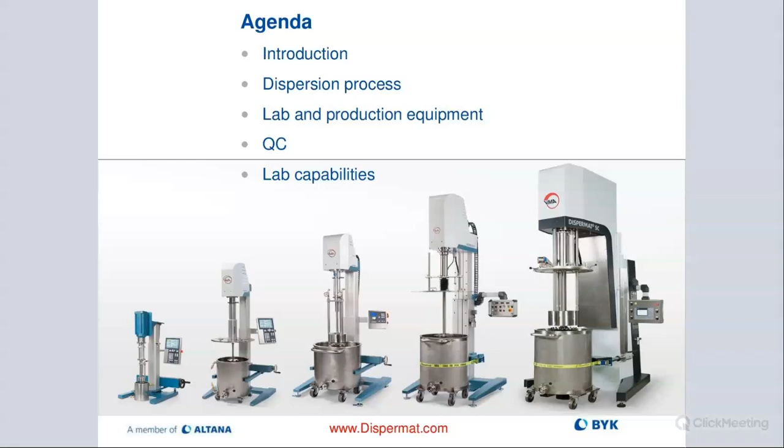Each of these machines can be used as a dissolver or as a media mill or rotor stator or vacuum system, depending on how you configure it. There's many different options of how you can accessorize the Dispermats. That's what kind of sets them apart from the competition.

And that was the vision that Hermann and Elke Getzmann had when they founded VMA-Getzmann in Germany in 1972. The good news is that business is still in family hands. So it's run today by the two kids. Christian and Martin are running the company out of Reichshof, which is about 30 miles east of Cologne. And just a quick background.

So BYK was one of the first customers of VMA Dispermats in Germany, BYK Chemie. And basically, they brought some of these dispersers over to the US and had them run in the lab up in Connecticut. And they brought customers into the facility to show them around. And a lot of customers that came in were really impressed by the quietness and by the efficiency of the Dispermats that they saw.

And they were asking if there would be any way that they could purchase these models. So that's when the former CEO at BYK made a decision that he would include or bring in the VMA-Getzmann product line to the BYK-Gardner product portfolio. So since 1988, we have become the exclusive distributor for VMA-Getzmann Dispermats in North America. So that's kind of like a quick background about the relationship between BYK and VMA.

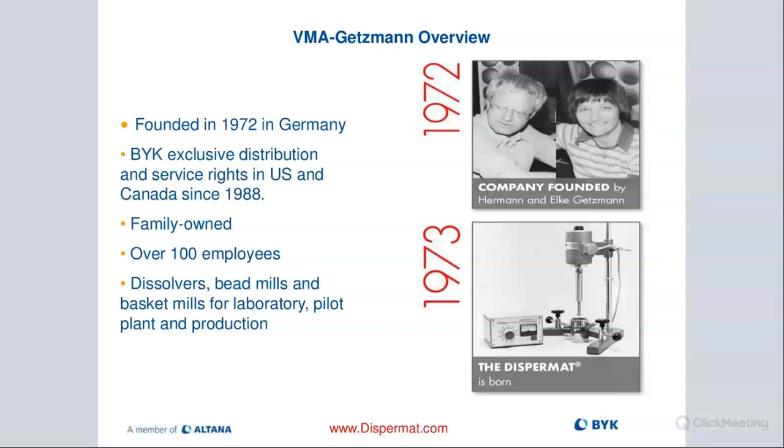So 40% of all the Dispermats that VMA manufactures are customized. A lot of customers, especially new markets, new industries, like batteries, lithium ion, different types of hydrogen applications for these electrolyzers, are very specific on what those slurries can get in contact with. So a lot of these Dispermats that are built have custom materials.

Some of them are plated with gold, believe it or not. We have some very high-end applications that require some very unique materials with our Dispermats. We also have one big company that makes platinum pastes - they're all custom machines. So it's really, really interesting how many different end-use markets are out there and how much customization really can take place with the Dispermat line.

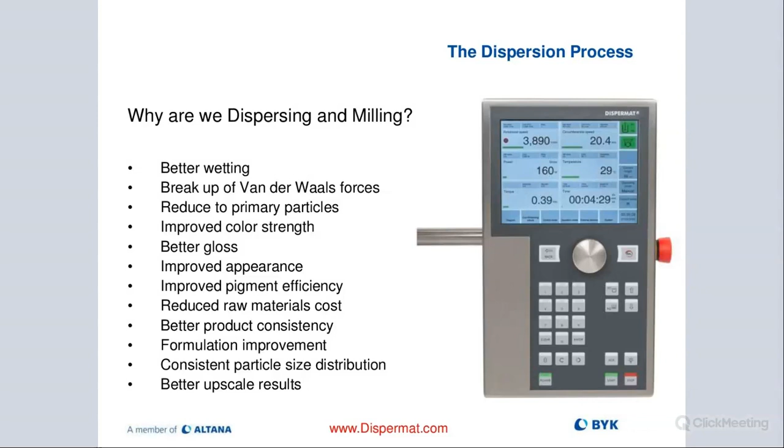And all of that should help us create better batches in manufacturing, which means we have better upscale results because of our dispersing and milling when it's done efficiently. Now, there are also issues if you don't do a good job doing the dispersion process of pigments.

You'll see it immediately visually - the color is not going to look as bright. You're going to have poor stability of the product, flocculation of pigments. That's usually a big part of it is formulation related, and we'll touch on that a little bit.

Formulation additives are really critical if I want to have a very good dispersion when I'm done with my milling process. So it's really critical to have proper additives in the formula. Our sister company, BYK USA, obviously, most of you are probably very familiar with them.

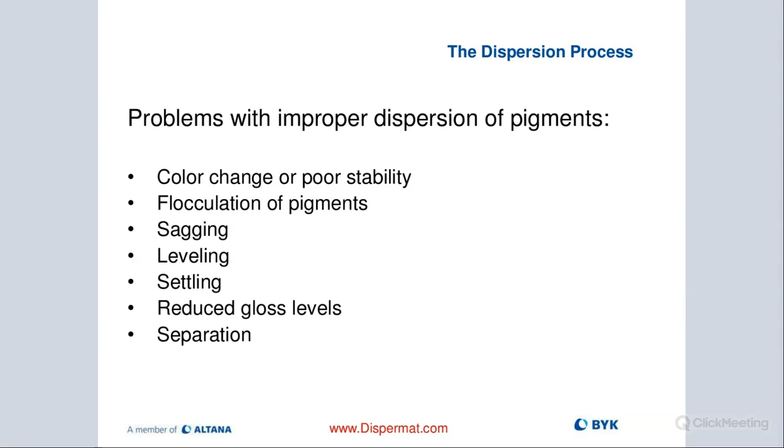They have some really good products that can help us keep these pigments in a suspended state so they don't flocculate back together. Sagging, leveling, settling - these are some key terms here. Reduced gloss, haze levels, and separation - these are just some of the issues that come up when we improperly disperse our pigment slurries.

So here's a good example. We ran a product, and on the left side we show you a pre-dispersed product, where we just used a Cowles blade. On the right side we show you a fully milled product, done with the basket mill. You can see on a Hegman how different they look.

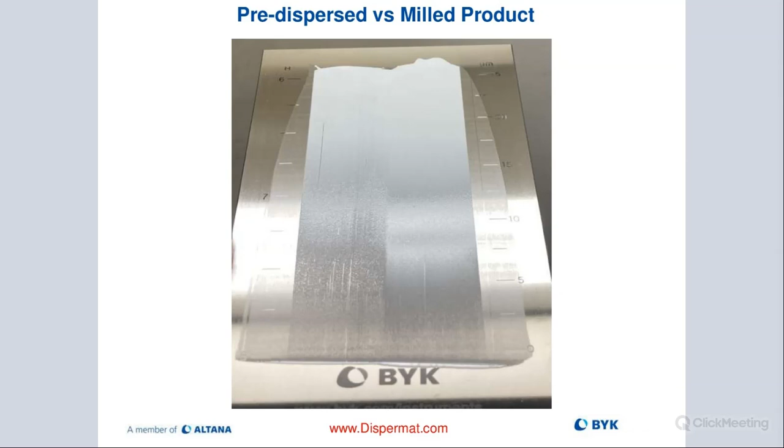A lot of times customers want to save time and costs, and they think they can get by with just using a Cowles blade. But the truth is, unless you're happy with an inconsistent, poor quality product, you'll be much better off using milling technology after you're done using a Cowles blade.

So there are some things that are really important here. Stability of our product - pigments have to have very good, strong color fastness. That helps with fading over time. Brightness is another outcome of a very good dispersion, and that usually gives us the best looking color.

And of course, the smaller we can bring down our particle size, the better color we have, the better will be our transparency. As I mentioned earlier, cost is a big driver because it allows us to use less of the very expensive pigments in our formula if we do a good job reducing the particle size.

Usually viscosity is another important aspect here because we want to be able to process the material. If the viscosity is really high, sometimes it's difficult to move the material through the media mills. For example, with basket mills, we can't mill anything too viscous because the pumps won't be able to draw the material into the basket mill. So viscosity is really critical.

Usually we're looking for a sweet spot anywhere from 2,000 to about 8,000 centipoise. We can work with lower and higher, but this viscosity range is really good for putting in the right amount of energy that helps us break up these binding forces. If our viscosity was super low, like water, then it's very difficult to put in a lot of energy.

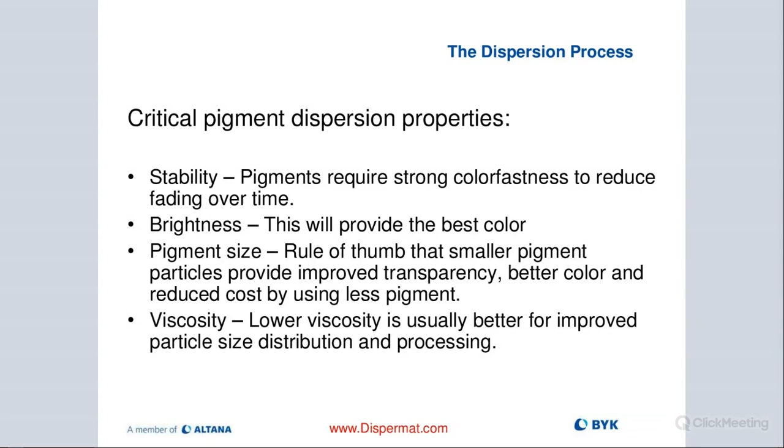So we have to disperse or mill longer to really get to the particle size we're looking for, because it's just more difficult to put in the energy needed. So we want to maybe change or look at the formulation to bring up the viscosity into that nice range - 2 to 8,000 centipoise. That really helps us from an energy standpoint.

It's really important to remember that we are not trying to destroy our particles or pigments. We are really only breaking up these binding forces. That's all we are doing.

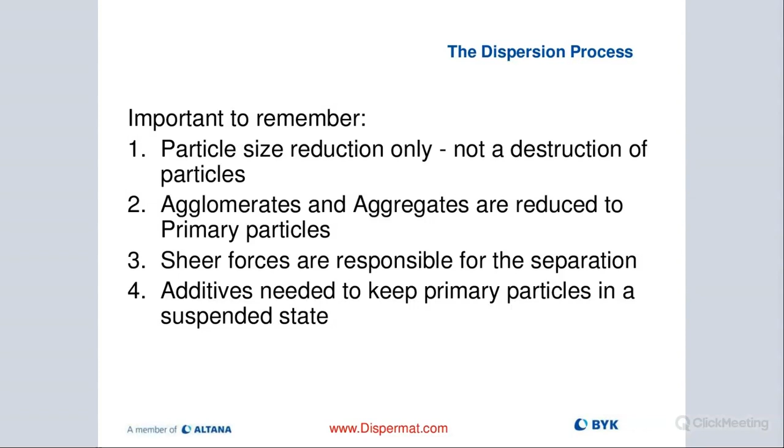We're turning these agglomerates into aggregates when we use a Cowles blade. Then if we do the milling, we reduce the aggregates down to the primary particle size. The shear forces are responsible for that separation - that's the only thing that helps us there. And obviously the additives always play a critical part in a good functioning and good looking product.

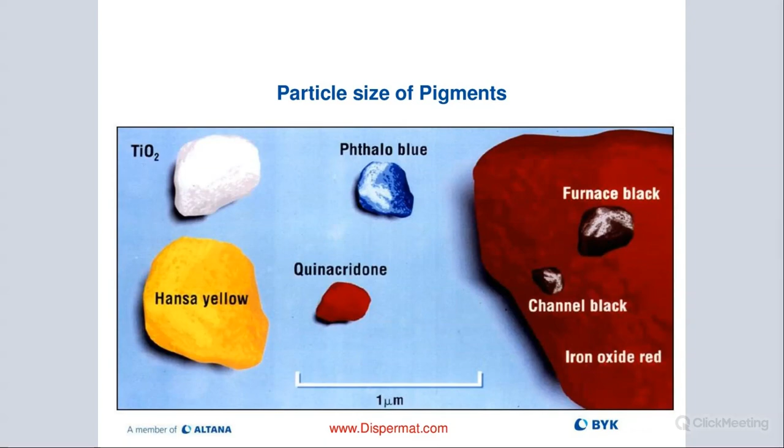It's just an example of the different types of pigments, what that looks like under a microscope. Most of you probably know, but for those who don't, that's kind of what that looks like under the microscope. We just want to be able to break up these binding forces and make sure the particles are separated in the dispersing and milling process.

This slide, I think, is really well done. It explains kind of what we're doing. So we have these larger blocks, like these cubes, and they're fused together. These are basically primary particles that are all clumped in larger clusters. We call these large clusters agglomerates.

Then when we take a Cowles blade and expose these agglomerates to it at a high tip speed, looking at 18 to 25 meters per second, which is an optimum pre-dispersion tip speed, that allows us to pull in enough shear to break up the binding forces and reduce these agglomerates to smaller particle clusters we call aggregates.

Now, from the aggregate level to get down to the primary particle, a Cowles blade is no longer sufficient, so we need to use a media mill. You cannot go from an agglomerate down to primary particle size just using a Cowles blade. It's not possible because we're usually topping out at about 10 microns of particle size if we're only using a Cowles blade.

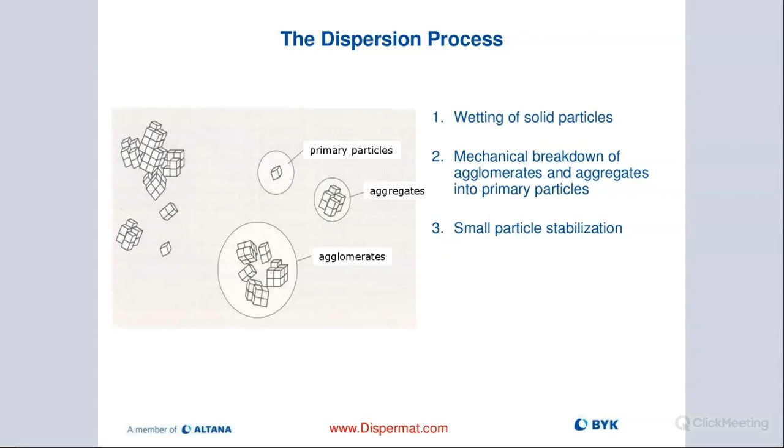Among other things, we're also wetting our solid particles, and then we try to stabilize the smaller particles in our slurry by using the right type of additive in our formulation. So this shows you the process: you have your Cowles blade first for wetting and pre-dispersing, de-agglomerating our larger particle clusters. Then when we reach the aggregate size, a threshold of about 10 to 30 microns depending on the pigment or formulation, we're actually milling, and there we're able to bring the particles down to primary particle size.

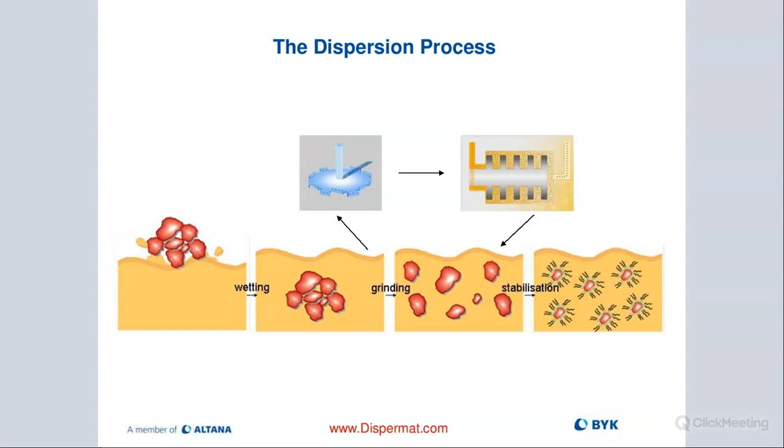This slide is interesting because it shows the breakout. We start with the dissolver, and then at about 10 microns we start medium milling. There are different types of medium mills. Some of you are probably familiar with old school 3-roll mills - that's older technology that's being replaced now with more efficient milling systems, like basket mills, which are fantastic. We prove that out in our lab on a weekly basis where customers come in.

We had one customer for specific ink formulations who was doing everything on a 3-roll mill. They were milling for 18 hours on 3 different pigments to bring down the particle size. By changing it over to a bead mill, a basket mill in that case, we were able to do that whole job in 45 minutes. So you can imagine the excitement there - the amount of cost savings just by changing the process is really huge when it's done the right way.

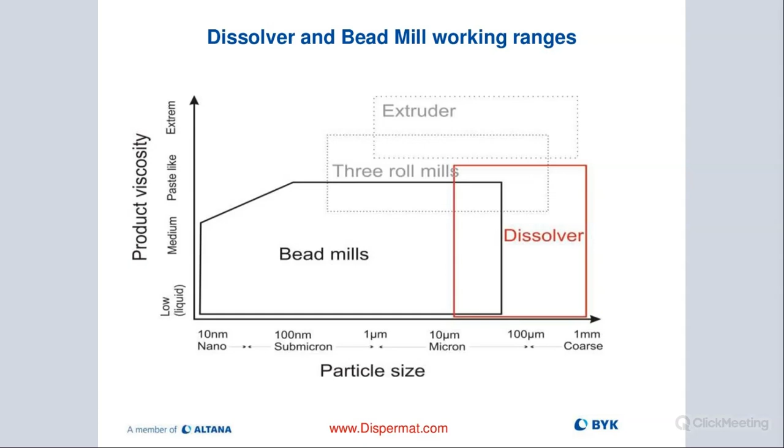And then with the bead mills, we're able to go super small. We also have some applications where we want to go below 150 nanometers, and with the bead mills, with the right bead mill design for nanoparticles, that is easily achievable. But you need to have the right setup, of course.

Critical to remember here that dispersing is a 2-step process. We have our pre-dispersion process where we use the Cowles blade, again 18 to 25 meters per second, done with the dissolvers. And then we have our medium milling, fine grinding, or fine dispersing, where we're reducing our milling speed - the speed of our milling disc or rotor - down to between 10 to 16 meters per second.

There we have our vertical mills. We have what's called an APS system, stands for air pressure system - I'll show you that in a little bit. We have our basket mill system called TML, and then we also have horizontal medium mills called SL in the lab space and RS in the manufacturing arena.

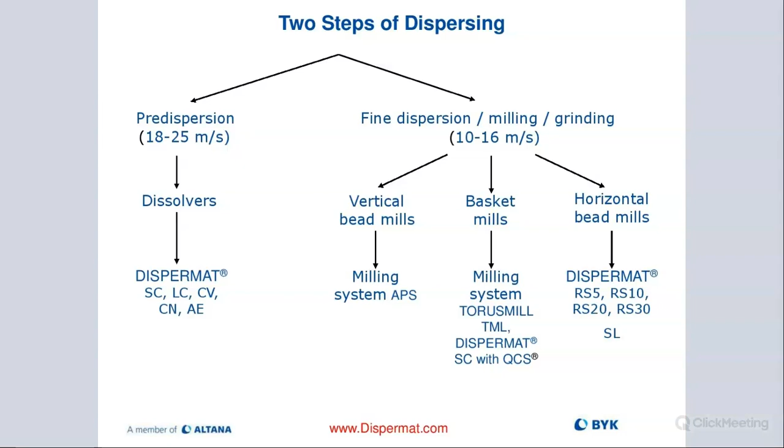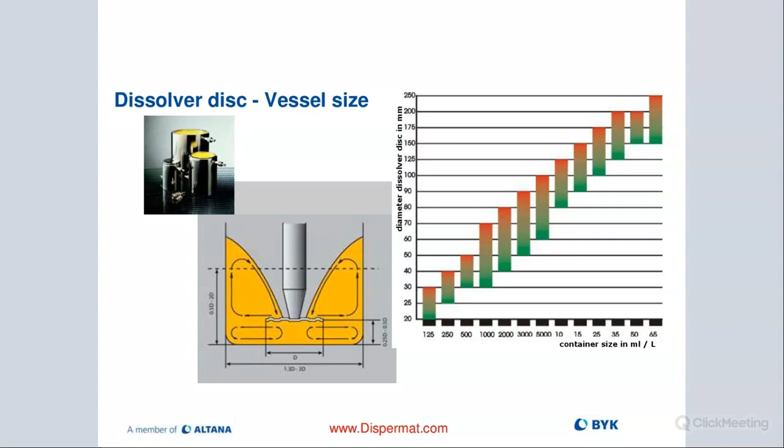That picture on the table on the right-hand side shows you the volume of the container in milliliters, and then you can see, depending on the viscosity, the disc diameter you could use with that container size. So if you have, let's say, a 1 liter container, you'd be optimizing probably to start with a 50 millimeter blade, and then you kind of see what's going on and work from there. Usually that pre-dispersion process shouldn't take any more than 15 to maybe 30 minutes, and then you should have a fully pre-dispersed material that's ready to be milled with one of the different medium mills.

If you want meters per second, express the diameter of the dispersion blade in meters, and divide everything by 60. So if my blade diameter was 50 millimeters, I would express that as 0.05 times 3.14 times the RPMs, let's say 2000, and divide everything by 60. That gives you an accurate number for the actual tip or peripheral speed of the blade in meters per second. You want to be between 18 to 25 to optimize that pre-dispersion process.

The formula is exactly the same when calculating milling disc speed, except you're reducing that speed and go between 10 to 16 meters per second.

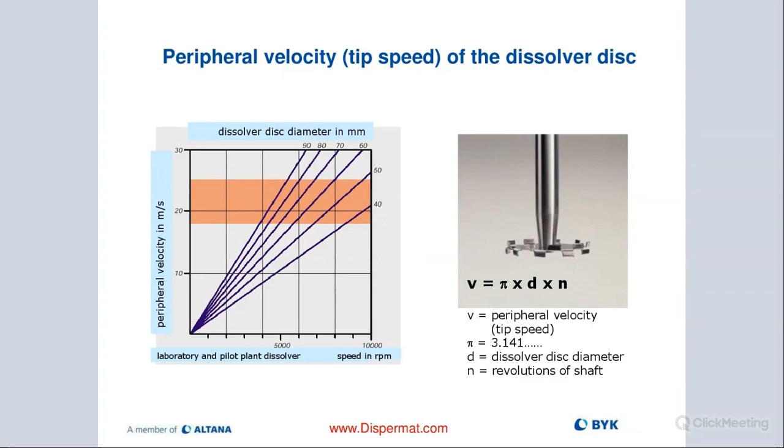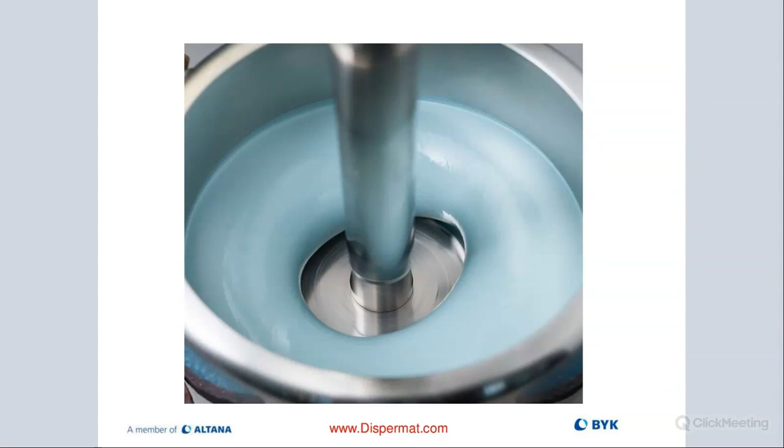This is the donut, a very nice picture of what you can actually see inside of the pot if you have the optimized tip speed and also the right viscosity range. You should look in there and see that beautiful donut being formed. That gives you the indicator that you're doing it the right way.

So 15 to 30 minutes for your pre-dispersion, the donut effect, again tip speed 18 to 25 meters per second. Geometric consideration, again blade diameter, depending on the size of the container. The viscosity, you can move it up or down.

There's different types of Cowles blades or impeller discs with different sets of teeth or different angles. There's a lot of custom discs out there with different materials - ceramic, coated, Teflon. Depending on what you're trying to disperse, there's many different options from a design aspect when it comes to the Cowles blades.

The volume of the mill base should be about 50%, not exceeding 70% or less than 40% in the container, or you're spilling or not able to circulate properly. So 50% fill rate is what we recommend.

The right pigment fill concentration, of course. Try to keep the temperature as low as possible, because when we're dispersing, even with the Cowles blade, we're putting in energy and we are increasing the temperature automatically through that process.

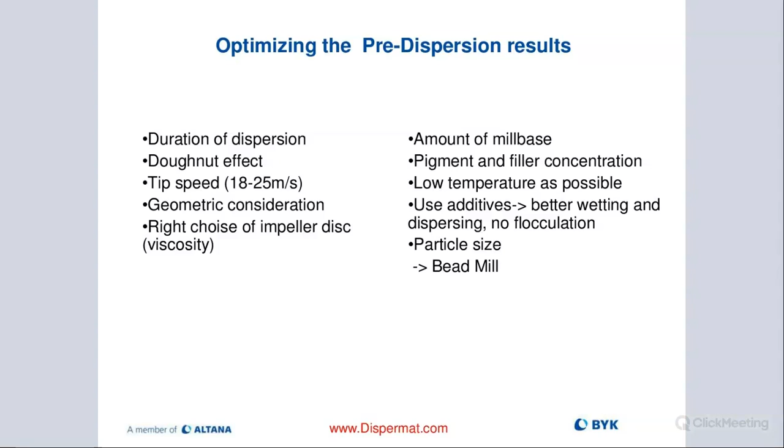Additives are again critical, important to maintain good product consistency so you don't have reflocculation of the pigments post milling. Then look at the particle size. Do a Hegman after the pre-dispersion results and see where you are. If you're completed with the pre-dispersion process, move over to the media milling to actually get down to the primary particle size.

With the dissolver, we're able to put in a limited amount of energy because we only have a blade, we're not using media. Again, it's only for de-agglomeration, not to go from aggregate to primary. But it is a critical step.

It's important - we're also wetting our pigments, we make good use of the additives that are in there, and we're homogenizing everything. It's really important that you do this properly and don't forgo it and go straight to a mill, because you would have issues there with clogging of the screens or dynamic gap.

We really need to be sure that we are in a workable pigment particle size range before we start milling, and usually that threshold is about 10 microns.

When we are milling, we are able to put in a lot more energy down to primary particle size, and we'll get a really clean looking, really beautiful product if we have a good formula.

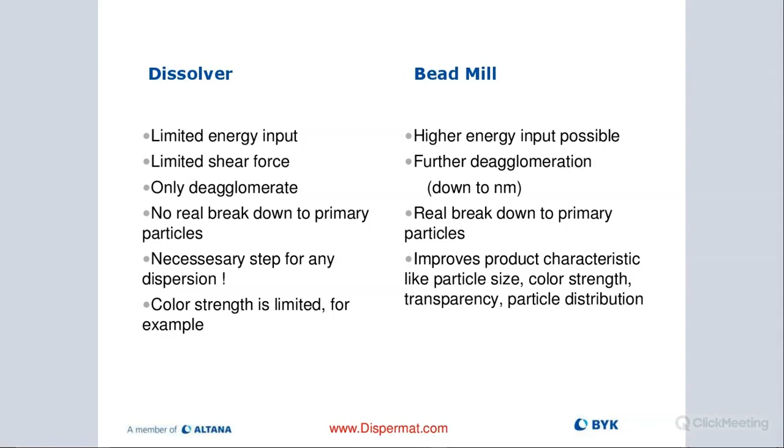So with that, we're going to take a quick look into the actual mill, what's happening inside. Obviously we have a rotor, a milling disc, and then we have beads. As we're basically turning up the rotor speed or the milling disc speed, these beads start to drift around inside of that milling chamber or basket at very high speeds.

They move all over the place. They impact the sidewall of our media mills, the rotor. They wear everything down over time.

So the choice of proper rotor material, or maybe even ceramic lined milling chamber to reduce the wear of the equipment, becomes very critical because there's really a lot going on inside of our mill.

As these medias, or these grinding balls or beads, start drifting towards each other or impacting each other, right before the point of impact you can see on the top picture where basically that force is causing these particles to shear off.

And that is actually what's happening inside of a media mill. Contrary to what a lot of people think, when I'm milling, I'm actually crushing my pigment particles or other particles in between two balls. That is actually a very unlikely thing to happen. The probability is very small. Why is that?

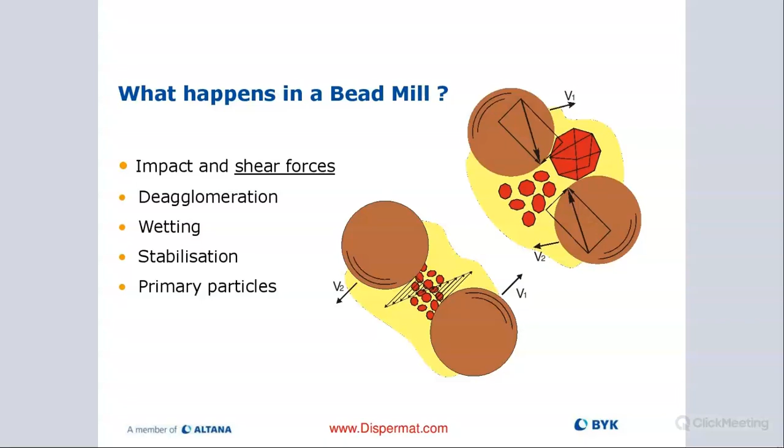So that's what's happening inside of the bead mill. Then again, what makes a big difference is the type of media we are using. We always recommend using higher grade beads, meaning zirconium oxide, yttrium, or cerium stabilized. There's a number of different beads. Use the right size - we can talk about that later, but bead sizing becomes an issue. If you start at 10 microns, usually a 1 to 1.2 millimeter bead size should be good.

Then use good quality zirconium oxide beads. You can compare that to a glass bead - the specific weight is 6.1 compared to 2.5, so it's almost 2.5 times heavier than a glass bead. But if you look at the Vickers hardness, it's almost 3 times as hard.

So what happens if you use glass? The most beautiful thing is you save money initially because glass beads are a lot cheaper than zirconium oxide beads. But that's kind of where all the fun ends, because the glass beads will wear quicker. They tend to break up. You'll end up with shards in your mill base that you have to filter out. More importantly, you're going to find they wear very unevenly, and then you're going to have a lot of fines and not the correct size of glass beads inside your milling chamber. So you'll have to do constant filtering and screening, and it's a very tedious and expensive process because it takes a lot of time. Also your milling efficiency goes way down because the beads are not as heavy, so you need more time - your kinetic energy is reduced, and obviously they're not as hard. So that is not ideal.

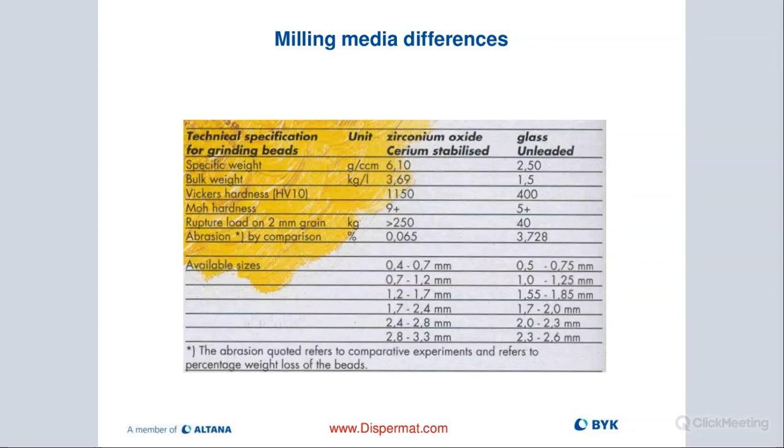And then we can really efficiently mill down from about 10 microns to about 1 to 2 microns very quickly on most formulas, and even down to 600-700 nanometers with the same bead size. If we want to go smaller with our primary particles, we need to start reducing the media size, and we go down progressively as our particle size gets reduced also.

That's important to remember, we also need to go down with our media size as we're getting smaller. Now, this is important, the influence of our bead weight. If I look at that nail, it's kind of the same thing that's happening when I'm milling. If I take a large bead or large hammer, I drive that nail in with one blow. But if I change the weight of my hammer, it can take me more impacts.

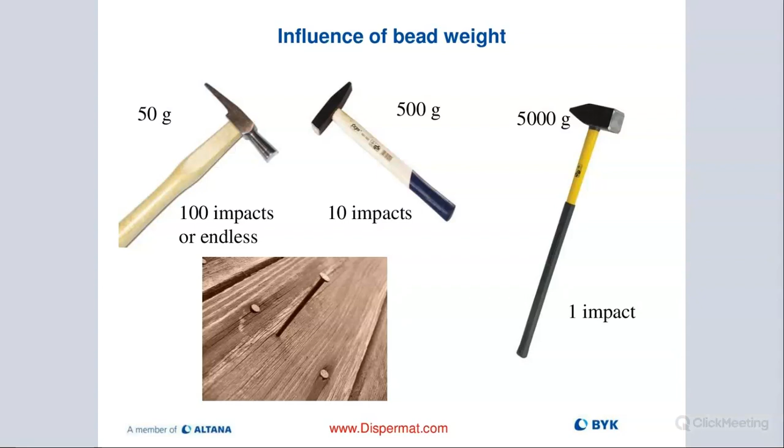If I'm reducing the size of my hammer, I can go from one impact to maybe 100. So the weight is really critical with my kinetic energy. Always use higher specific beads with high specific gravity. That's why zirconium is much better than glass for that principle alone.

That's a formula, you may want to write it down. I don't really use it because we know the beads that we are using, but some people may want to calculate that. So here's your formula, and we will share the presentation so you can write that down, or download it and copy it from there.

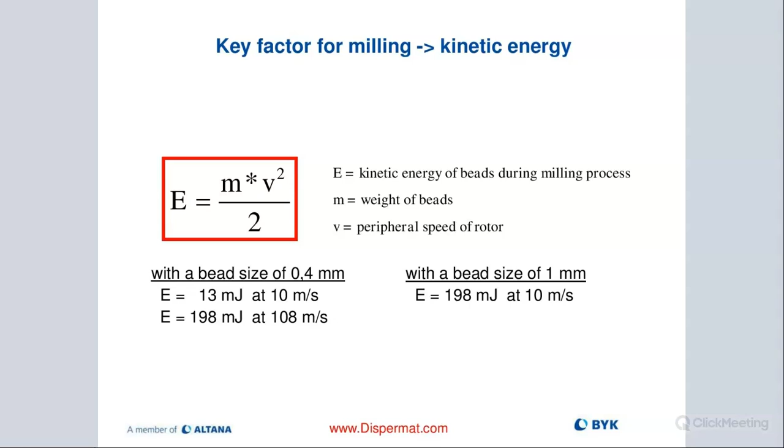Here is another slide showing what we talked about earlier. You have these larger beads under the microscope, the pigment particle in the center left, and the sheared particle cluster in the center right, reducing that larger aggregate to primary particle size. This happens as the beads collide. Right in that corner is where the shearing takes place, and a lot of force is created, causing the shearing of our aggregate, breaking up these van der Waals forces and reducing particle size down to primary particle size.

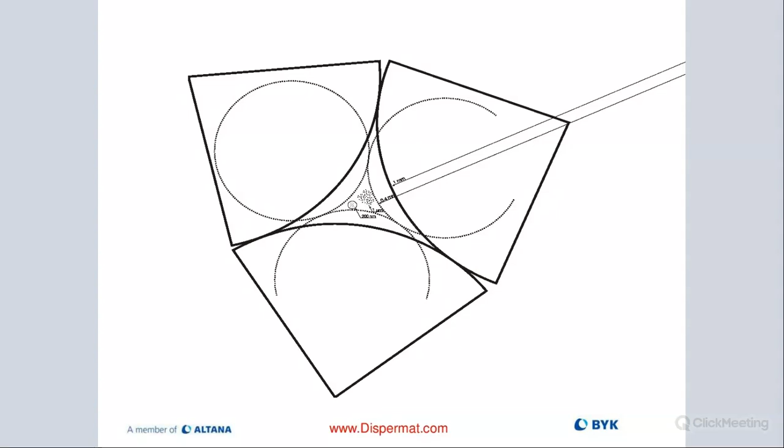So it's important to keep in mind that after pre-dispersing, we want to be between 10 to 30 microns of particle size. Bead weight and size, we just talked about that. The type of bead, we covered that - zirconium oxide is highly recommended. The bead volume depends on the type of milling system we use, the amount of beads, the shape of our beads. Always make sure you screen your beads, not every time if you use zirconium, but periodically to get rid of the fines and replace them with new beads, so always have good quality.

Bead loading, tip speed, we talked about that, 10 to 16 meters per second when we're milling. Product temperature is critical, especially when milling since we're putting in a lot of energy, so we want to cool it properly. Double wall containers, double wall supply vessels, double wall milling chamber, double wall milling basket become very critical when milling, so temperature control is very important. If you do not have it, you cannot properly mill because the temperature will go up very quickly. And if you're running solvent-based products, it gets even more critical because you'll evaporate all the solvents rapidly, and it could also pose a danger because the temperature rises very fast.

Milling time, obviously there's really no rule there. We have seen going from 3-roll mills to a basket mill, from 18 hours down to 45 minutes. But we've also seen instances where a basket mill was used for a specific application and they milled for 2-3 hours. Really extensive, long milling times overnight, we don't really see. But depending on your formula, some mill quicker, some take longer, as we talked about earlier.

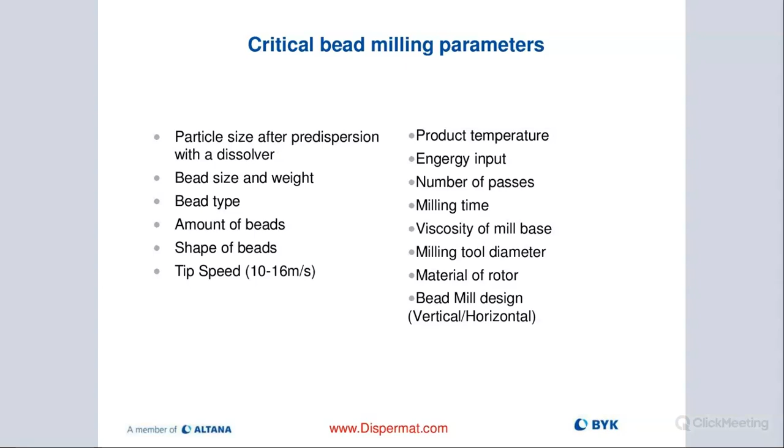Then there's the design of my media mill - we have the vertical, horizontal, or basket mill design, and that plays a role in how we're going about the business.

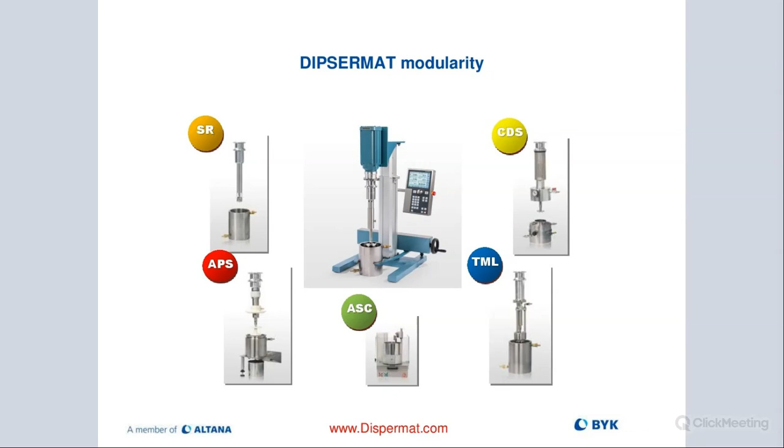We also have a vacuum system. We have the basket mill on the bottom right, called the TML. We're also making TMLs now with vacuum, because some people, or more and more people, are finding out that their milling efficiency improves a lot by using vacuum, because we're removing the air from our slurry.

If you think about the air, these are tiny, small air bubbles, and they're basically acting almost as little mattresses - they cushion the blow of the media. So your milling will take longer, and your milling efficiency is reduced if you have a lot of air bubbles inside your slurry. By taking out the air, I'm improving my milling efficiency and I get to a satisfactory end result faster.

I'm also able to quicker transfer my material, my mill base, from one container to another. This becomes very prevalent in the manufacturing cycle, where sometimes it takes a long time to move from one container to another when I'm done milling, if I have a lot of air inside my mill base.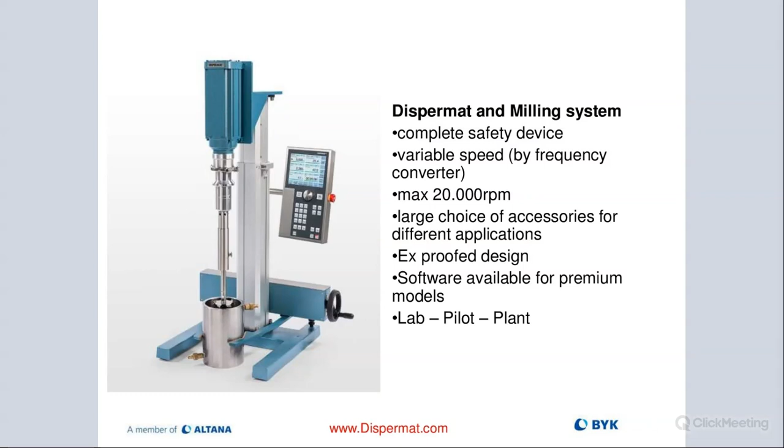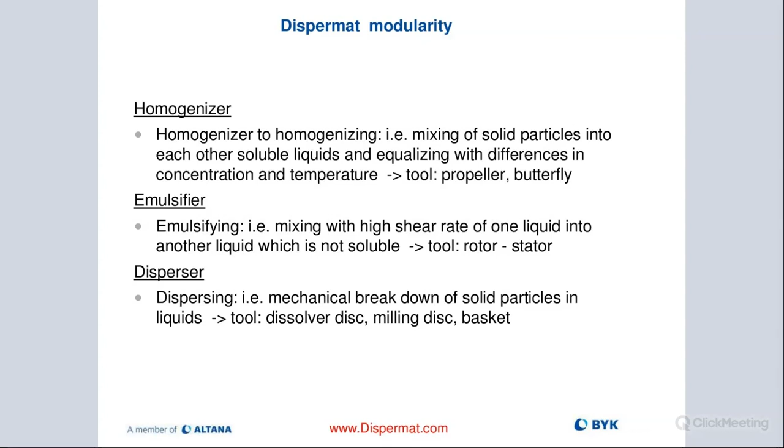So just to summarize, we can use a dispermat as a homogenizer, emulsifier, or disperser, and depending on what you're trying to do, with the different attachments you have different options here.

Okay, so a quick view on the basket mill, the TOURUSMILL TML as it's called. We have that all the way from lab scale to manufacturing - a very interesting piece of equipment because it gives you excellent milling performance, very quick milling performance, and it's easy to clean.

We have competitors that have similar mills, they call them immersion mills, and we've seen them with screens on the side. We purposely opted against that design philosophy for a number of reasons. First of all, on this slide, you can't see the beads in here - you just see a milling disc and the pumping wheel on top. The yellow is the pumping wheel, and the milling disc is right below.

That chamber is filled with beads. When you're milling, that milling disc is working really hard to get these beads moving inside of that milling chamber. If the screen was on the side, the media would impact the screens very often, very quickly, and very hard, meaning you'd have excessive wear of your screen because of the design of the mill.

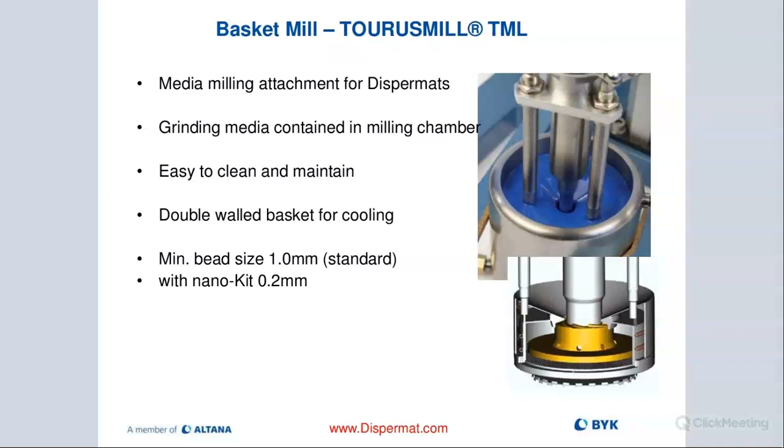Right below the screen, we have a Cowles blade that helps us draw the mill base outside of the basket and then pump it back around to the top, where you can see that very nicely right here. Basically very nice milling action in and out of our basket. So the Cowles blade does a good job, and then the pumping wheel will suck the mill base back in.

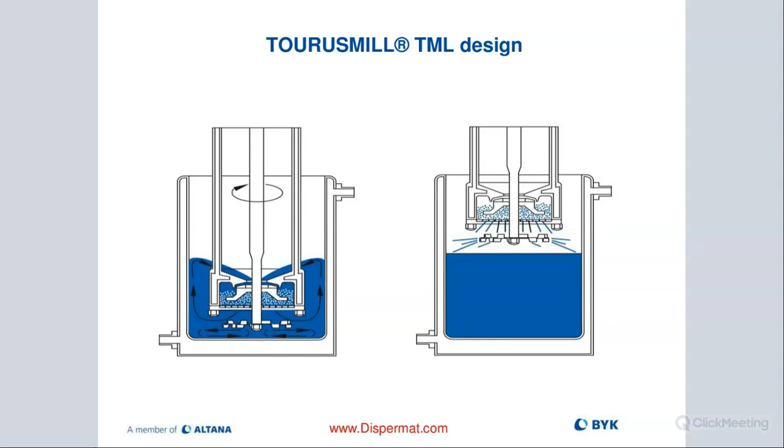And you can see here, we're showing the beads on this graph on the left. And then on the right, we're just taking it out and showing you the finished product.

This is a manufacturing scale TML, beautiful polished steel. Again, we have 3 bars that are holding the basket. So the one, of course, the left basket or the right bar, coolant in or water in. On the left, coolant water out. And in the back, we have another bar, that's where actually our temperature sensor goes in, and we measure the actual temperature inside of our basket. So we know always what is happening there, how hot is the material getting, and are we efficiently cooling.

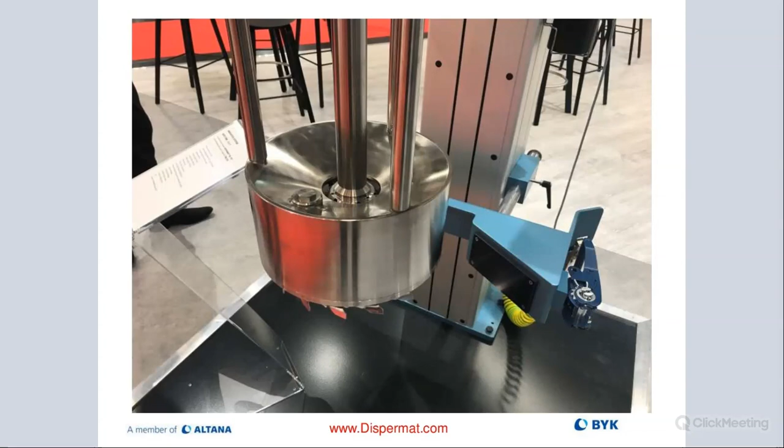So that's really important. The screw right there is only for the bead filling channel, and that's where we basically put in our beads on the manufacturing side.

Again, we can go from very small volumes up to 2,000 liters. We have, with the C technology and with our TML concept, very good upscale ratio, almost 1-to-1. Very easy to clean our mills.

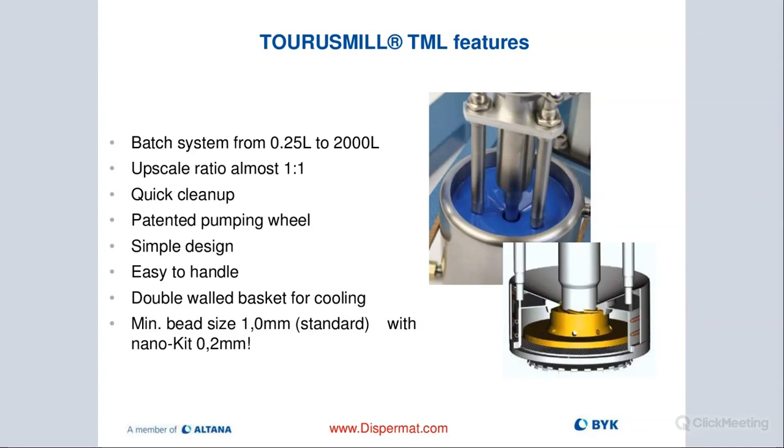What's also very attractive is the design of our Dispermats with that quick change system, where we're able to just put on different attachments. So customers running different color families just buy different baskets, and they dedicate these basket mills for the different color families, then use them as they need them for running a different color. The advantage is you're not tying down the equipment for cleaning for half a day. You're just swapping the baskets and then running it again. So that's one of the huge advantages of the Dispermat over some of these other milling concepts that are out there.

But basically what happens here is you have your container. You put the container underneath the TML. You add your raw materials, either there or somewhere else where you can weigh it out properly. And then you start the pre-dispersion process with the blade. After about half an hour, or depending on what material you're running, you can go and push a button on the control panel, and the basket comes down, and now you're milling.

So you don't have to move the container around. Everything is done in one location on one machine, in one continuous process. That's a huge advantage for customers trying to save space in their manufacturing environment and have a very clean and efficient milling cycle.

And then we have the APS mill here. Basically, this is more for the lab, not really manufacturing. So you have 2 containers, top and bottom, and you are milling or pre-dispersing first in the top container with the Cowles blade. Then you swap out the blade for a milling disc, you add beads, and then you pull down the cover.

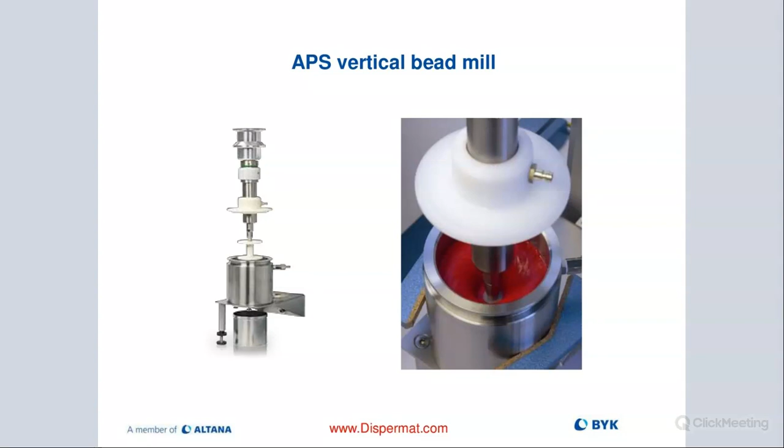See that on the right? You close it up. There's a clamping ring that goes around it, and then you're milling. On the bottom of the top container, you can see a screen that separates the media from the container on the bottom.

There's a drain plug in there also. So when you're done milling, all you do is remove the drain plug, hook up an air hose. There is a socket, an air socket, that is only there to pressurize my APS system and purge out my mill base through the screen into my container below. So that basically is a very, very efficient way of milling.

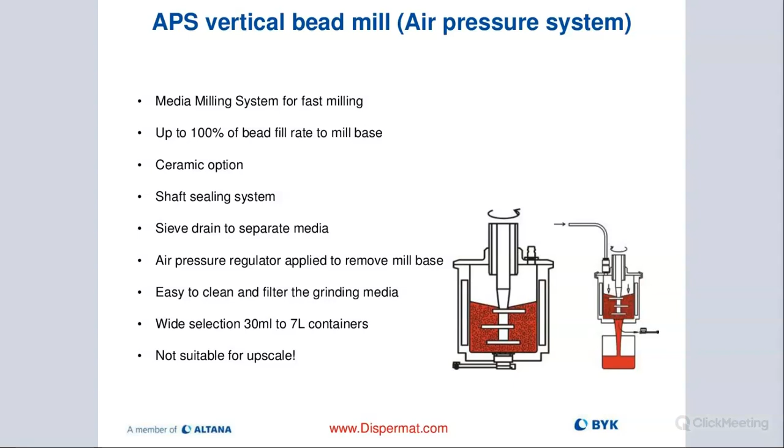Many samples, very small volume, inside of my laboratory. Not really efficient though when I'm trying to make production scale batches, because I would need a lot of media. We can add the same amount of media as we have material in there.

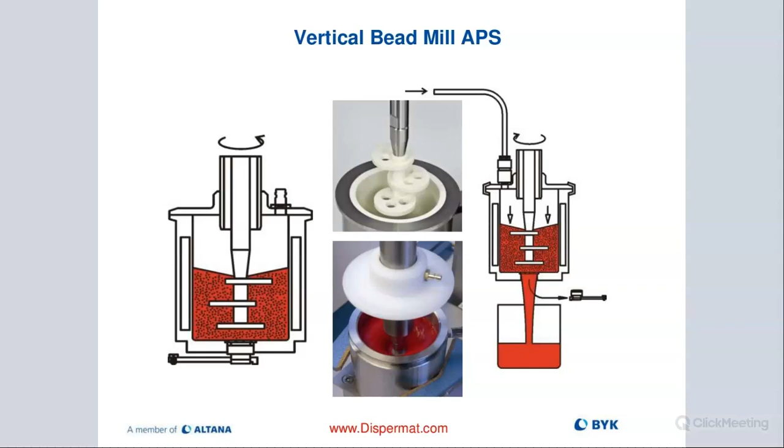So if I am running 500 milliliters of material, I can add 500 milliliters of beads. Now I get very good milling efficiency, very fast milling. But if I'm trying to do this with 2,000 liters, I'd have to put 2 tons of beads in there. It would be cost prohibitive. And also, how do you handle that many beads and that volume? So this is really a great design for the lab, but unfortunately not really scalable.

So then we have here just a couple pictures of our horizontal mill design. We have the SL, beautiful machine, also with the C technology here. And then we have the RS, which is our production scale horizontal media mill. You'll see here on the picture on the left, the supply vessel. There is a pumping and stirring system with a motor that sits right on top that actually forces our mill base into the milling chamber.

And then basically the material would circulate back and then come up and back into our supply vessel. So very good circulation of our mill base in and out of the mill. And you can also do pass through. So if you want to just go one cycle, you're done, or move it to another mill.

Some people set up numerous horizontal mills in succession. So they go from one mill to another mill to another mill. And the only thing that changes will be the screen size and the media size. So they basically go progressively smaller if they want very fine material and don't want to swap out the beads on one machine. That is a way of getting down to very, very small particles very efficiently.

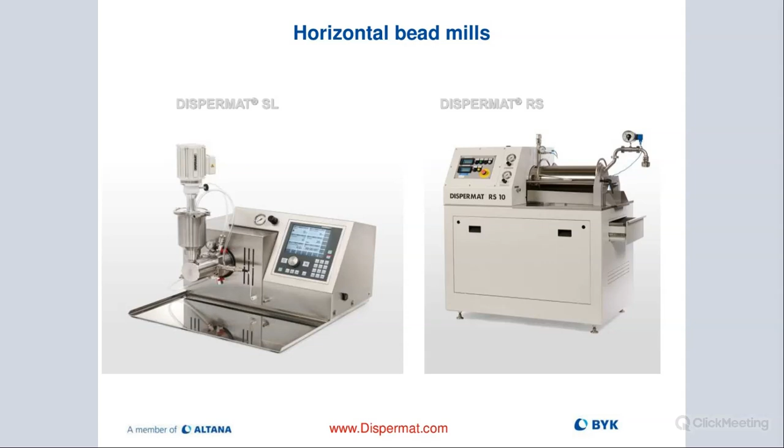But it may not be the most cost-effective way initially, because you have to buy multiple pieces of machinery. But if you think about how long it takes to clean and take apart a mill, it may make a lot more sense depending on the volume of material you're trying to produce.

So, the SL or RS, which is the manufacturing scale, is our horizontal media mill. Again, pass through or circulation mode. The integrated pumping and stirring system is unique. We also have the ability to go up to 6,000 RPM, which gets us exactly to 10 to 16 meters per second of rotor speed. We can independently control our milling rotor from our pumping speed.

Again, also on the horizontal media mills, we offer ceramic, zirconium oxide, silicon carbide, different hard steel, whatever, for different applications. So there's a lot of new end-use markets like battery, hydrogen, you name it. They all require specific materials to be used inside of the mill, so as not to contaminate or cross-contaminate the slurries.

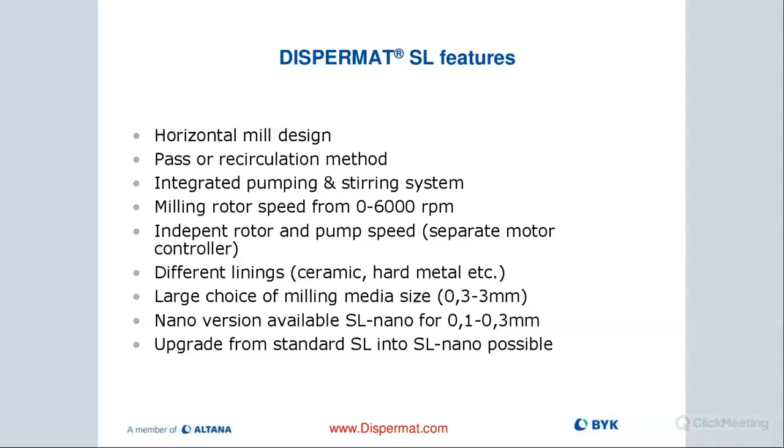Depending on the screen size or dynamic gap that you're using, you have the choice of many different media sizes. And then there's also nano machines available, or even a nano kit that allows you to upgrade from a standard SL to a nano machine if you require super, super small particle size. We have the ability on the C technology kind of to control a lot of these parameters. So we also have what's called cutoff values.

Just if the temperature is an issue, you have the ability to control that and set a maximum temperature. Once that point is reached, the machine will either stop or run at a different speed or energy input.

You also have the ability to program 2 separate warning stages that alert the user, hey, you're approaching 80C, you may want to be careful here. So maybe at 70C, then at 75C, and then okay, we're almost at 80C, corrective action is needed. Otherwise, my milling process will stop or we run at a different speed.

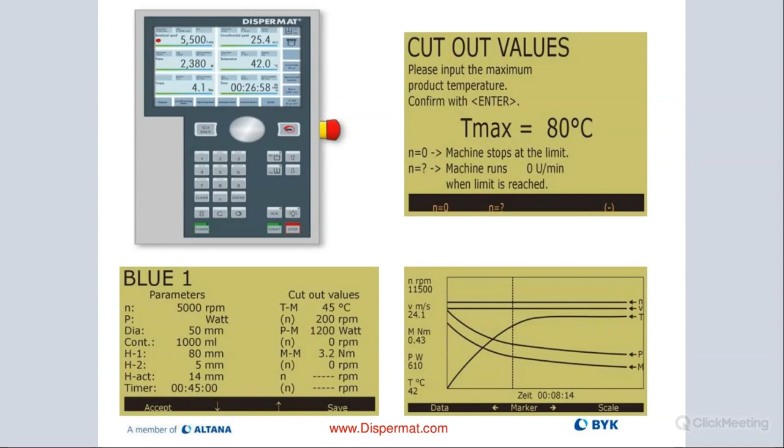We can also set up different parameters. I can set up a job parameter, give a product a color, a name, or a batch number, and then put in all the different values that pertain to this particular job. For example, if I want to run something with a certain speed or certain amount of energy, the right milling diameter, all these things I can program into my system to ensure that next time I'm running the same project, I'm getting the same end result.

I can also, with the C technology, do what's called a net power calibration. That's interesting because when the machine runs without product, it's already showing a torque value and so on, because it's moving its own parts. By doing a net power calibration, I can factor out those values. So when I look at energy input or torque value, I'm looking exactly at the numbers that pertain to the processing of my material without the noise from the machine.

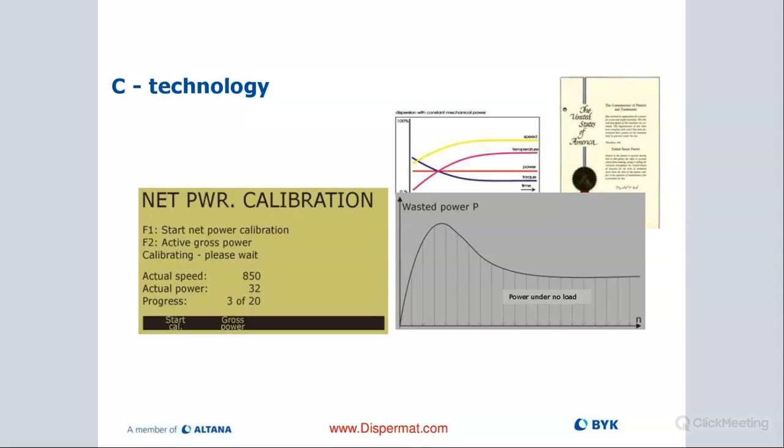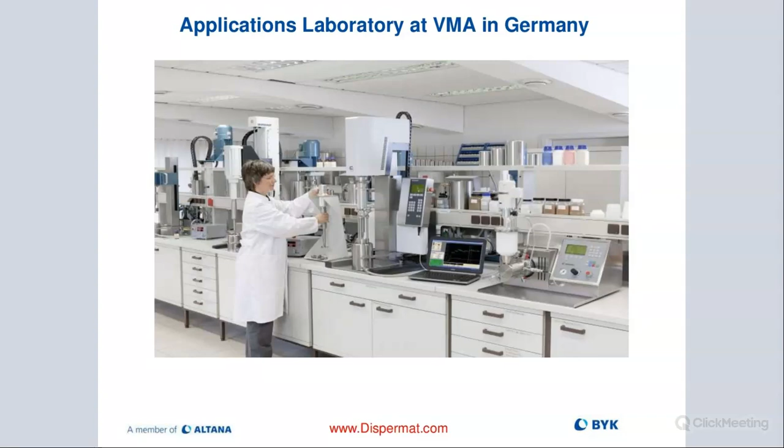That's what that does. Then we have really cool lab space. Obviously in Germany, a very high-end applications lab with many different dispermats, vacuum systems, dissolvers. But we also have a nice lab in Connecticut at BYK USA. You can see a lot of different attachments. This is actually an older picture. We have newer models now, and we have a really cool lab with a lot of good capabilities.

Here is the new Dispermat AE, and we have an SL machine in Wallingford. We also have a video you can watch about our lab and its capabilities on our YouTube channel, which we can share at the end of the presentation here.

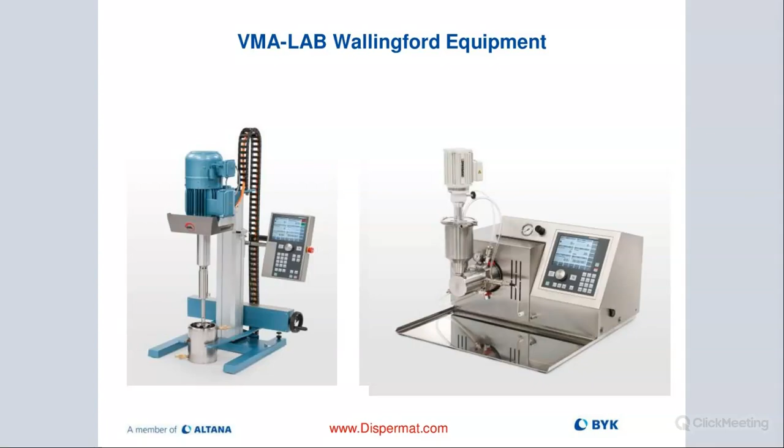But if you want to come up to our facility, please let us know. We welcome customers. We won't charge you if you come in for a day to explore the different types of equipment and also maybe run your product as a proof of concept, to see how well a basket mill, for example, mills down my material compared to the 3-roll mill we're using, or a horizontal media mill. Maybe I wanted to check out a rotor stator, so there are many different options we can explore to help you pick out the right solution and equipment.

Another big benefit is that by having it at BYK USA, we have the cooperation of our colleagues from the additive side to come in and give us really good, meaningful advice if we request it, on formulation improvements, letting us know exactly, hey, this additive works really well with that base formula as a defoamer, for example, or as a wetting agent or dispersing agent. So there are many different additives we can choose from that we have access to and will help you optimize the process and your formulas.

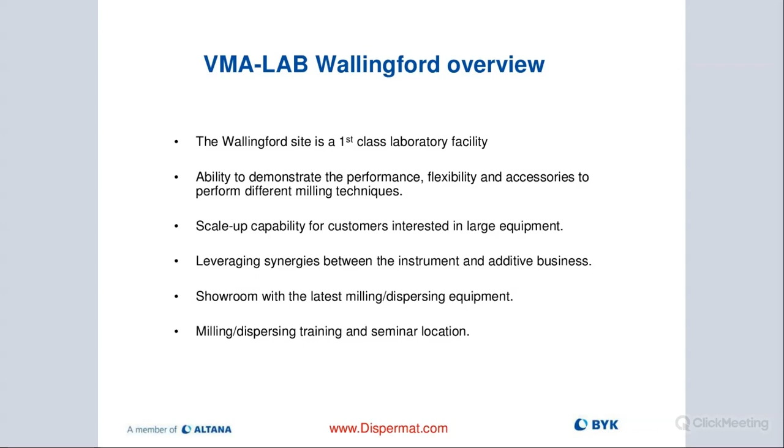So we don't want to come across as just a hardware supplier. We're really a turnkey solution provider to all your needs, from hardware as well as the formulation side. That's what we bring to the table, and it sets us apart from the competition.